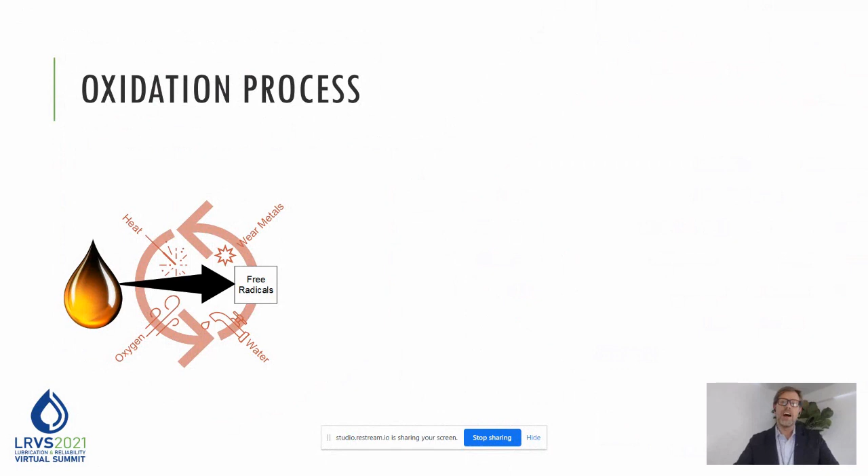But these free radicals will continue to react in an autocatalytic way until something stops it and terminates this reaction. This rate of reaction is also sped up by various different catalysts, such as wear metals, especially copper and iron. Heat will really speed up the rate of reaction, oxygen or air that's getting in the system, and water as well. So we have our little free radical, and this is what we would term as the initiation part of the process. The next part of the process we would refer to as propagation.

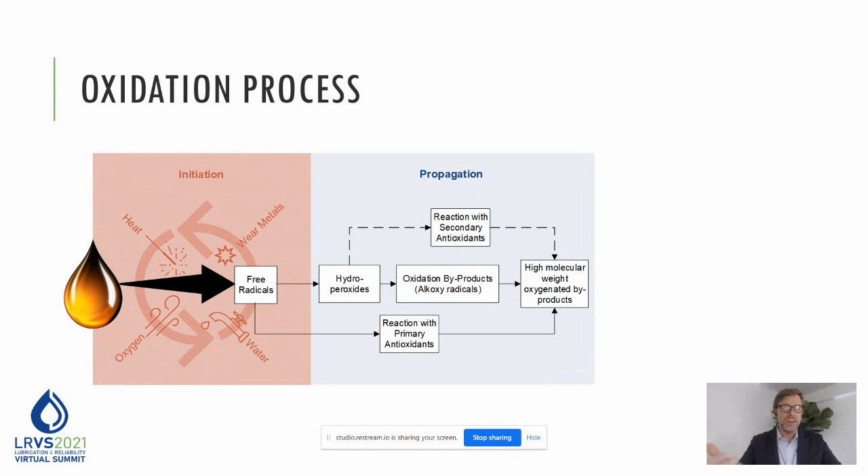And the propagation phase is when we have these free radicals that are now undergoing changes. So the free radicals hopefully will react with primary antioxidants such as amines or phenols, and will kind of neutralize or stop that reaction. They can also continue to degrade, turn into hydroperoxides, which in some formulations could be reacted with secondary antioxidants. Zinc dialkyldithiophosphate, or ZDDP, is a common secondary antioxidant that many people are familiar with. So that will react with the hydroperoxides.

All of these reactionary products will turn into higher molecular weight oxygenated byproducts that eventually in this termination phase, these molecules are somewhat polar in this non-polar environment. So they have a tendency to agglomerate and polymerize together. Why do we care about this, and why is this so important? Well, actually, this will have a pretty big impact on the lubricant. We're looking at physical changes to the lubricant, such as sludge formation, varnish formation. In some cases we also see viscosity increases, as well as chemical changes. So we'll actually see the acidic constituents in the oil grow, and then you'll see an acid number increase as well.

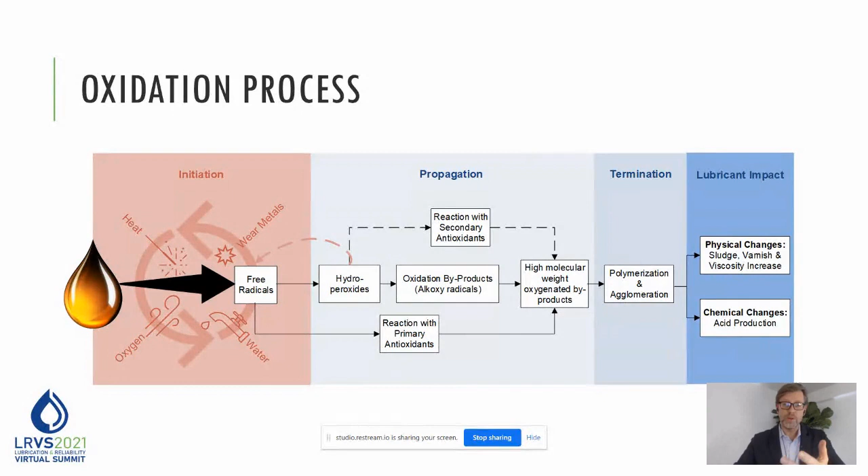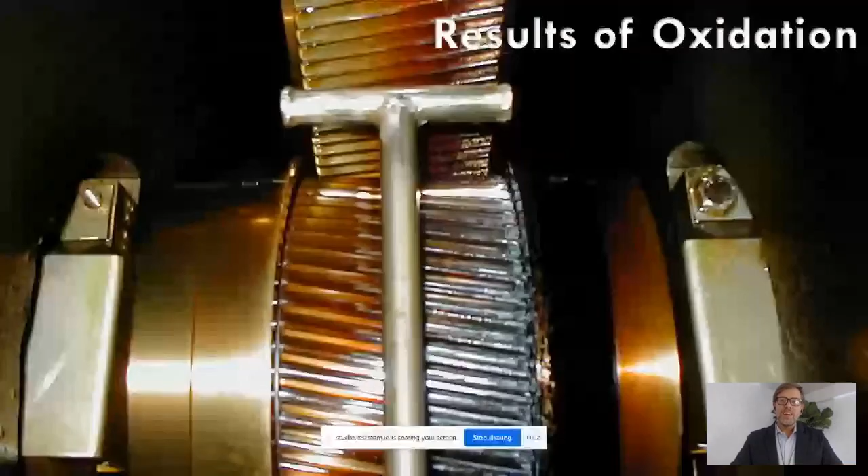So all of that leads to some of the problems that we want to try to address now. So some of the results of oxidation, all sorts of gooey, sludgy materials that, as you can imagine, are not so good for the reliability of equipment. So one of the questions that we've pondered and spent some time working on is, what can we do to impact this part right here, the physical changes? Is there anything that we can do to influence how and where and when these degradation products come out of solution and cause some of these problems?

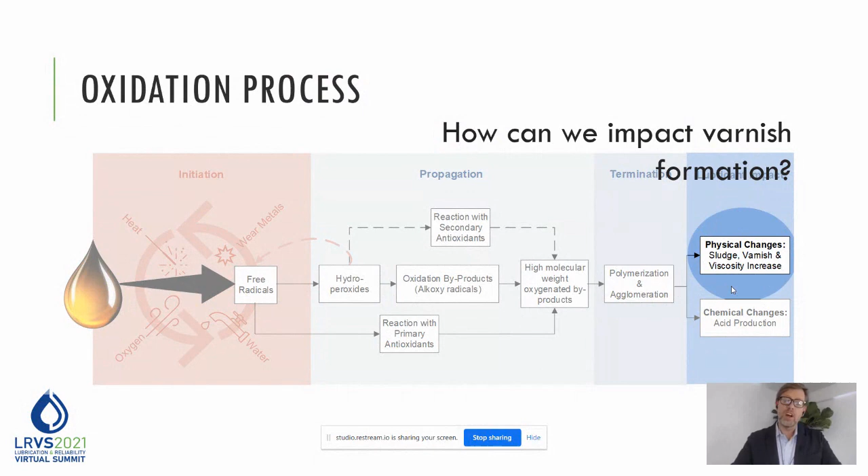But actually, before we get to that, we need to understand a little bit about solubility. The basic principle of solubility is like dissolves like. So if you have two materials that are somewhat similar together, they will dissolve. How do you know if materials are similar? There are several different ways of looking at this.

One is polarity, what we have up on the screen. Another is the energy of vaporization: how much energy is required to convert that substance into a vapor? And it just so happens that hydrocarbons that have similar energy of vaporization rates actually are more soluble together.

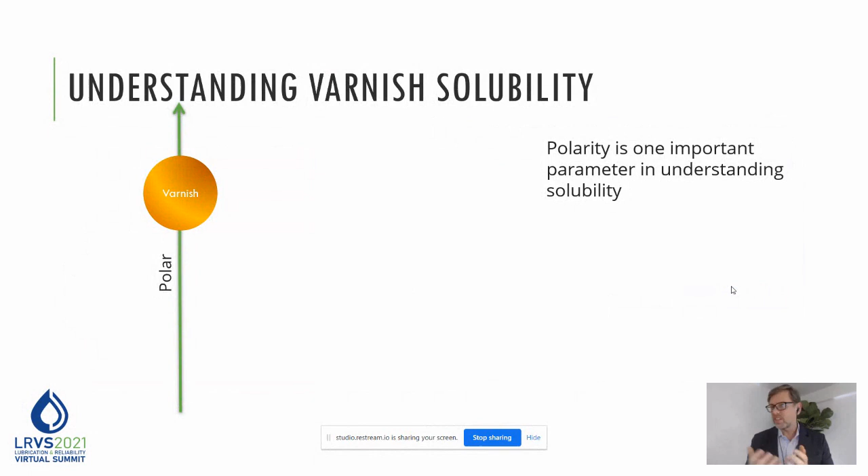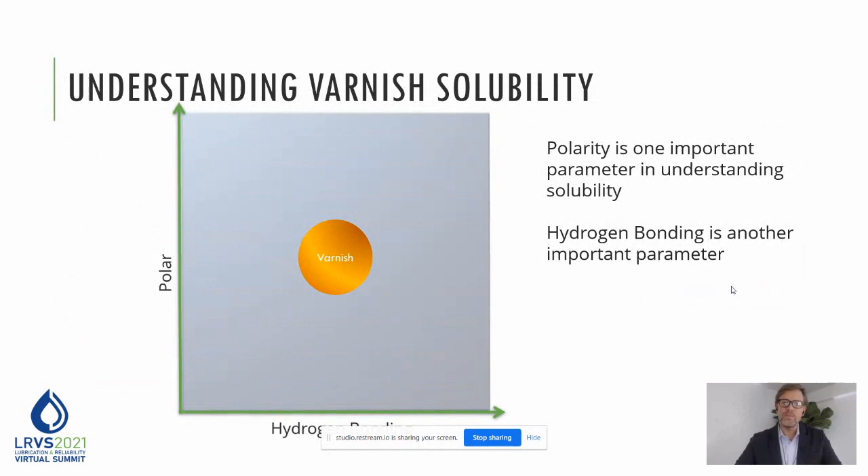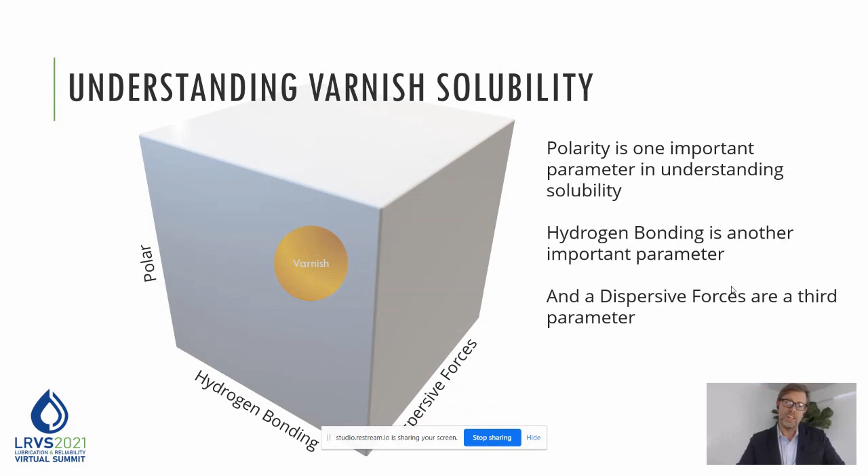And if we understand the composition, chemistry, and some of these properties of the varnish, we can then create a solubility enhancer that will encompass that. Based on this Hansen solubility parameter, this is a good tool to predict what will be solubilized in the oil and what will not. It also helps us understand when varnish will come out of solution and what its solubility is in oil as well.

So the solubility enhancer is actually a really effective way of decontaminating a lube oil system in between oil changes. It works by increasing the solubility of the in-service oil. And when you increase the solubility, you now allow the oil to actually dissolve some of these organic soluble degradation products that have settled out and formed.

And one of the benefits of this over, say, using a surface active agent like a dispersant or detergent technology is that the varnish is essentially dissolved one layer at a time. So you don't have a big sudden dump of contaminants. And also, once it's dissolved, it's held in the oil. This is not like an additive that is sacrificial, that will deplete over time, that you'll have to replenish. And so it works out to be a very effective way of decontaminating and desludging lube oil systems.

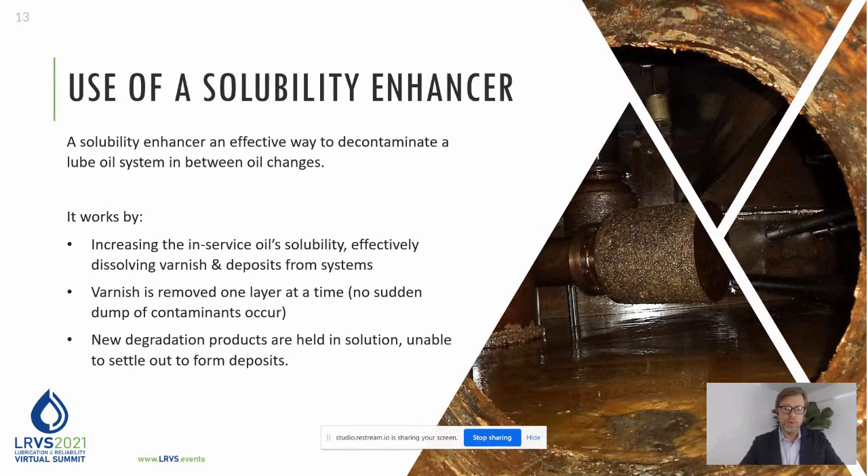So we would also refer to a solubility enhanced flush as an alternative method to decontaminating lube oil systems instead of introducing chemicals, some of which are sometimes incompatible with the lube oil system and can also impact the long-term performance of the new charge of oil.

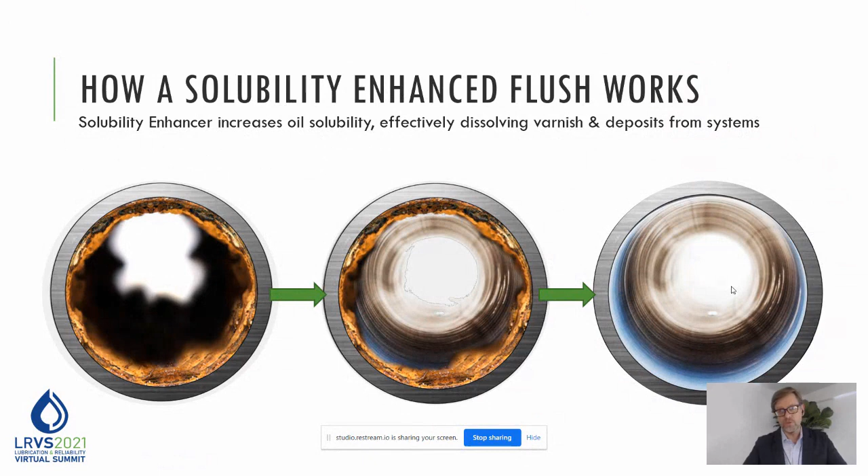So with a solubility enhanced flush, essentially you are dissolving the sludge and varnish in the system one layer at a time, leaving all the oil wetted surfaces nice and clean and ready for your new charge of oil. So this is good. We have a solubility enhancer that works in the short term. Is it possible to develop a solubility enhancer that can work long term, that can be a long-term deposit control technology in a varnish susceptible lubricant?

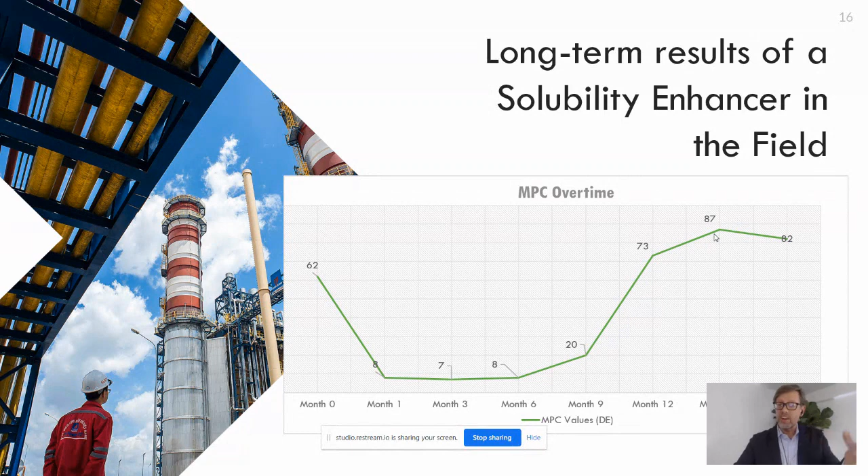So if you saw my earlier presentation, we talked a little bit about this accelerated oxidation test that we have that we refer to as the turbine oil performance prediction test, or the TOPP test. This is a fantastic tool for helping us benchmark different formulations of turbine oils and understanding what oils will function well under extreme accelerated oxidation stress. However, it also has been a really invaluable tool for us to understand what solubility enhancers can work. And if we put a solubility enhancer into a formulation and then really accelerate its oxidation, what will happen?

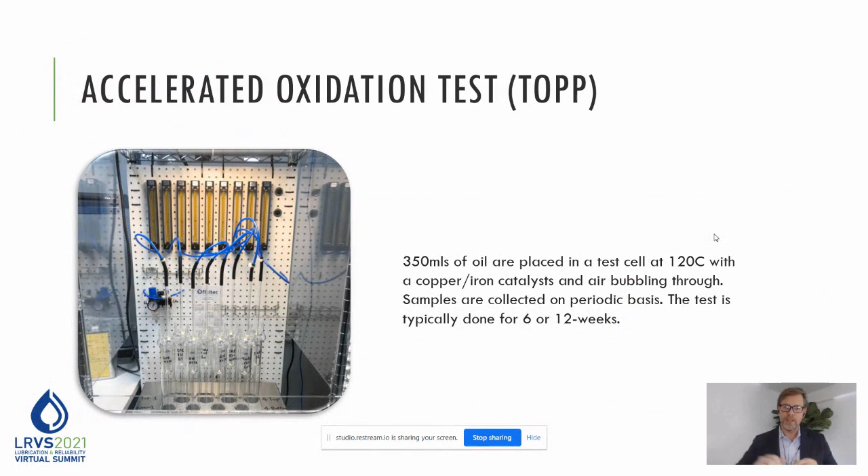So the principles of the test, basically we are putting several 350 mL test cells into a heated bath that we heat to 120 degrees with catalysts and air bubbling through it, basically to try to kill the sample. And then we'll take each tube out at a designated period of time, in some cases maybe once a week, or in other cases once every 3 weeks, and see what kind of chemical and physical changes happen in the fluid. And so doing this with solubility enhancing technologies, we saw actually a pretty big difference in performance.

So here we have a baseline with a fully formulated oil. And what we're looking at here are the MPC results and actually the weight of that MPC patch after 6 weeks in this accelerated oxidation test. So here a fully formulated oil ended with an MPC of about 60, and the weight of the patch is actually on the right-hand y-axis here, so approaching 600 milligrams per liter of weight on this patch.

We put a solubility enhancer in it, and in this case we actually saw a higher MPC, but actually a lower amount of weight on the patch. Let me just preface the weight on the patch. The MPC, I have a fair degree of comfort with the reproducibility, repeatability of this test. The weight of the patch, there are methods of making this more precise, but just weighing the MPC patch, I would say there's a fairly large margin of error, so at least plus or minus, say, 100 milligrams of sludge. But there is certainly a difference here between the baseline and the baseline with solubility enhancer 1.

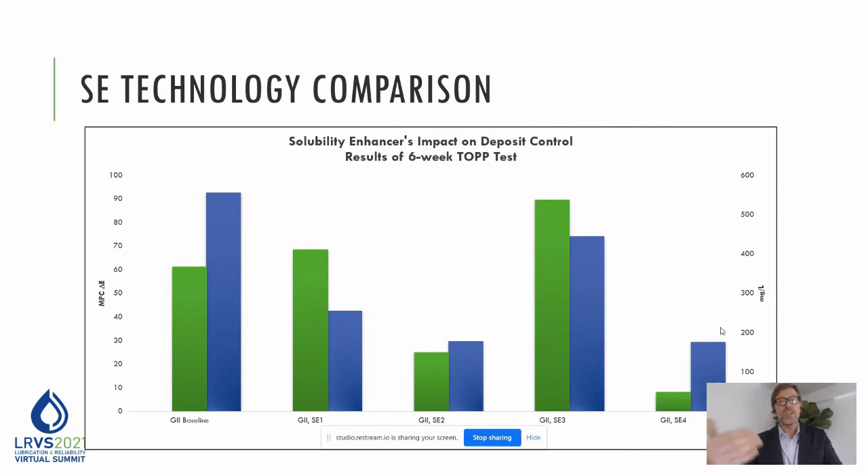Accelerated aging tests, I think, are a fantastic tool to simulate what may in fact happen in the field, but it's not the same as a real life field experience. So we sometimes compare this to an egg. If you have an egg and you incubate it and wait for some time, it will turn into a chicken. But if you heat that up a little bit, you're not going to have a chicken. You may have a hard-boiled egg. So there's not always a direct comparison between accelerated oxidation tests and the end result you see in the field. But at least this is a good estimation and gives us a little more confidence introducing this in the field.

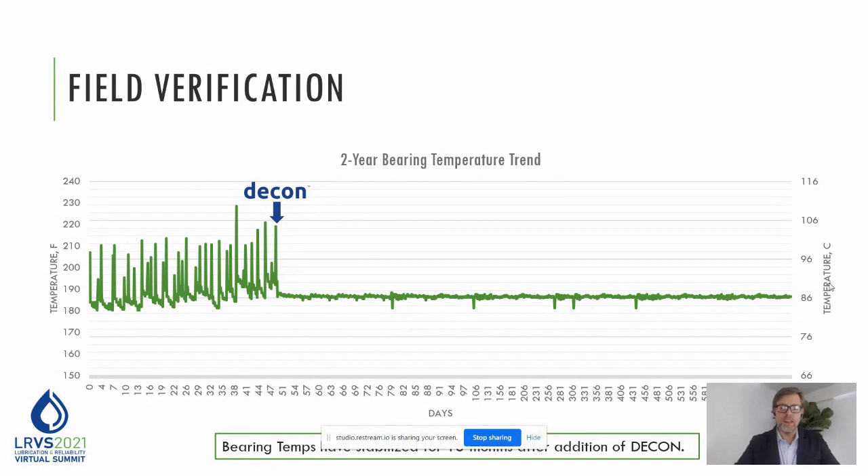So to summarize, understanding solubility is really a key to addressing lube oil varnish, which in most cases is a symptom of oxidation. There are different ways of understanding solubility. The basic principle of like dissolves like is something we can all relate to; we know that oil and water don't mix because their composition is not similar. We have found it very helpful to use the Hansen solubility parameters to predict what solubility enhancing technology could be most effective at dissolving varnish.

And we've been able to demonstrate and compare different technologies in accelerated aging tests in the lab. And finally, we have found a solubility enhancer that not only worked well short-term to dissolve varnish, but also provides long-term deposit control performance as well.